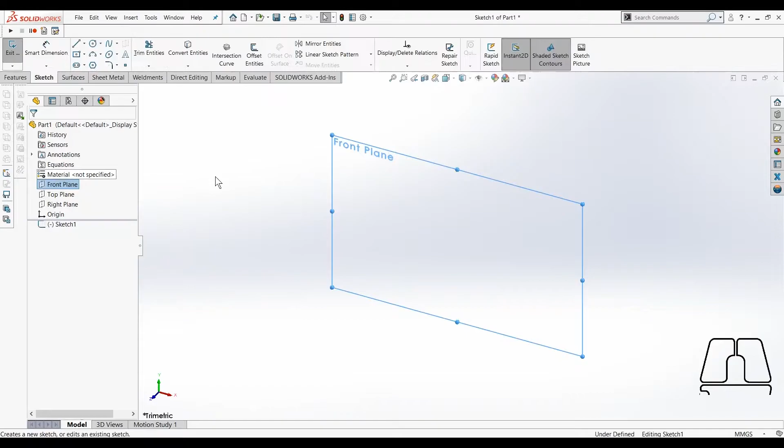So then we start a sketch on the front plane, and we will be outlining that profile view to extrude. We want to make sure that this line is vertical, as indicated by the yellow box of the vertical line, and we dimension this to be 75mm.

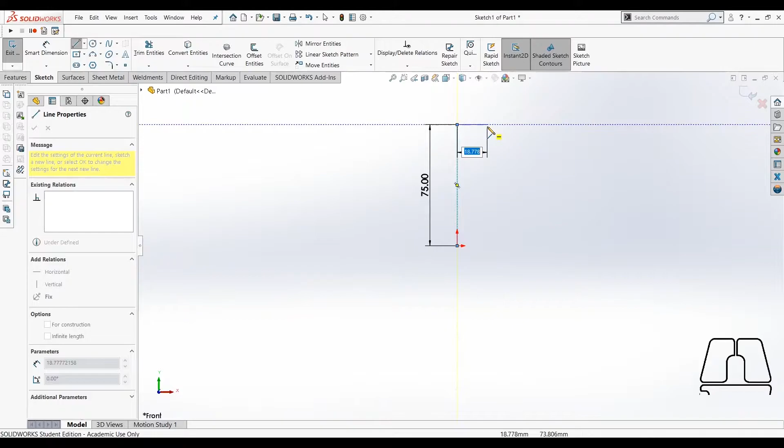And then next, we just complete the little staircase drawing. We want to make sure that we get our lines to be either perfectly vertical or horizontal. The sketch is now closed, and we can begin to dimension each of these lines.

This will be 60mm. This will be 12mm. This will also be 12mm. And this last horizontal piece will be 20mm. This distance between these two lines will be 12mm. And this edge over here will be 30mm.

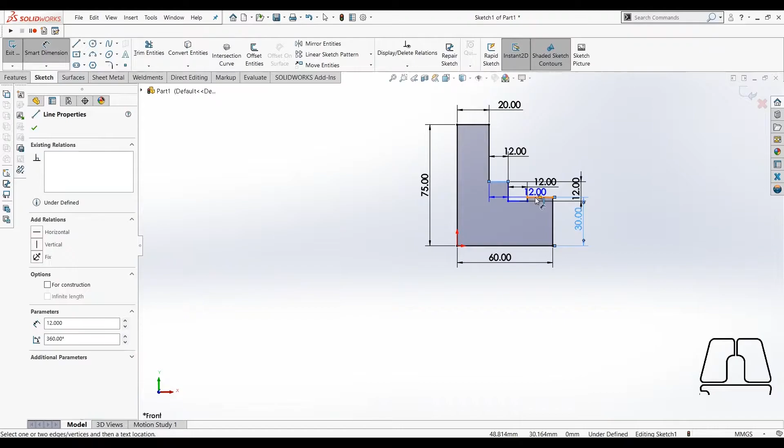And then the distance between these two lines will be 20mm. Now we can see that our sketch has been fully defined.

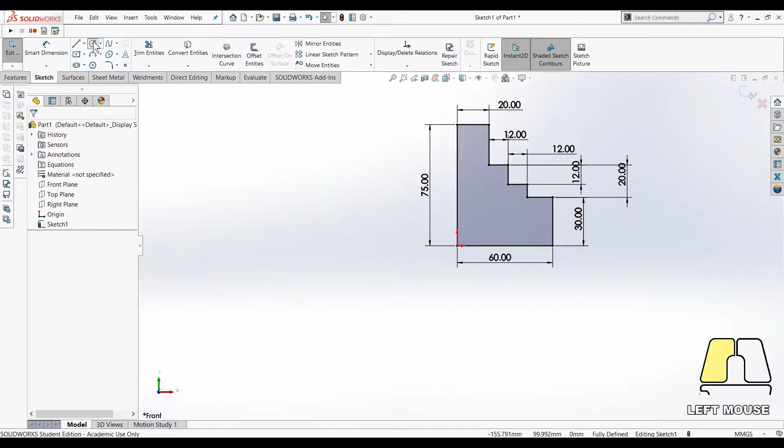Now we can add our little circular cutout. The diameter of the circle will be 12mm, and we can use smart dimensions to dimension its position. It will be 16mm from each of the edges on this right hand side.

And now our sketch is complete. We'll extrude the sketch by 28mm.

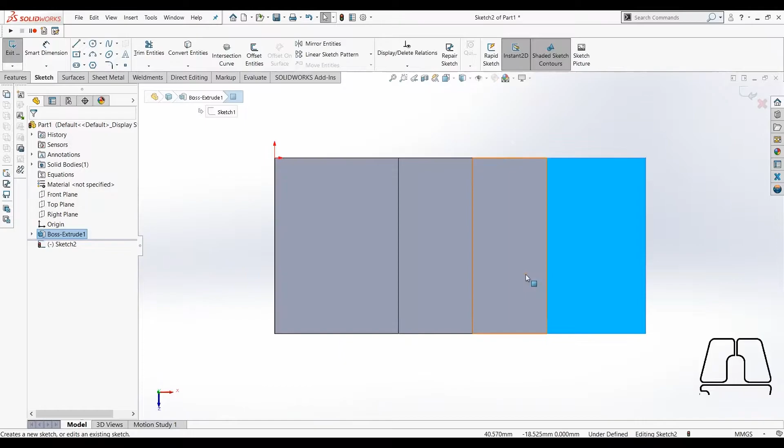And now for our second feature, we can create a sketch on this face. All we will need is a corner rectangle. We'll snap it to this corner and to this line.

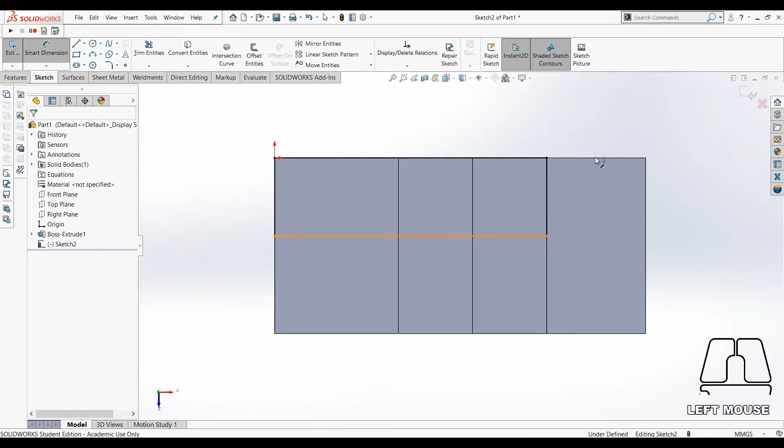And then we dimension this distance as 20mm. And this will be an extruded cut.

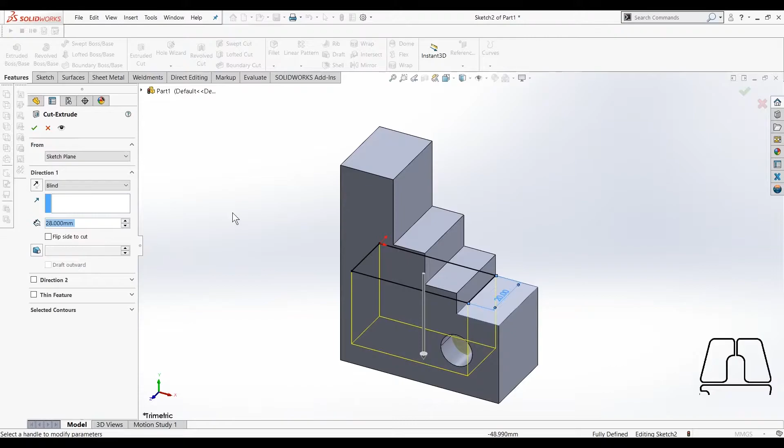First, we want to flip the direction of the cut. You select through all, and then we also flip the side to cut. So now the part's geometry is complete.

And we add a material. The material here is aluminum bronze. You can either scroll through this menu or just search it up in this handy search bar.

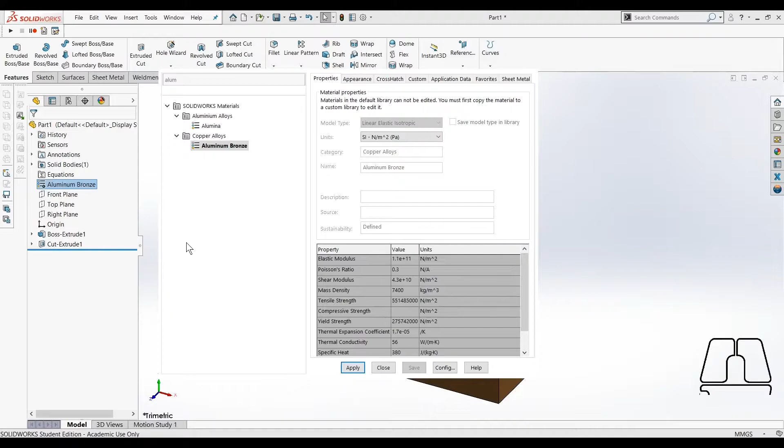After you finish a part, make sure to double check its mass properties. Well, that was our first part down. Now we'll be getting into our second part.

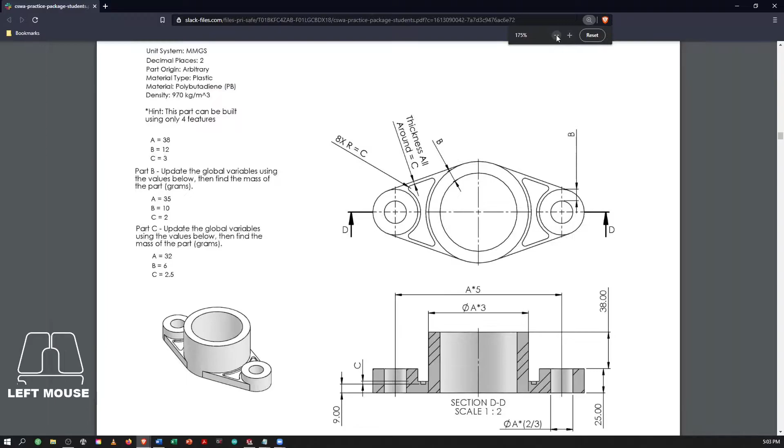This part is a tad bit more complicated. Let me zoom out a little bit. It's basically called a pipe fitting, so this might go on the end of a pipe, it might secure the pipe.

And basically you're given a couple of views here. You're given a top view, looking at it top down. You're given a side view, a kind of cross-section view, as we talked about before in our drawings video—check that out if you haven't already. And a sort of isometric view in the bottom left-hand corner.

Things to note: here it states your unit system, so millimeters, grams, and seconds. Then decimal places two—you don't really need to worry about this since all the dimensions given don't actually have decimal points. Part origin arbitrary just means that you can place your origin wherever you want it to be. Your first part can go wherever.

More specifically is PB. As Willy did, he changed the material to, I believe, some sort of copper alloy, some sort of metal alloy. In this case, it's going to be plastic.

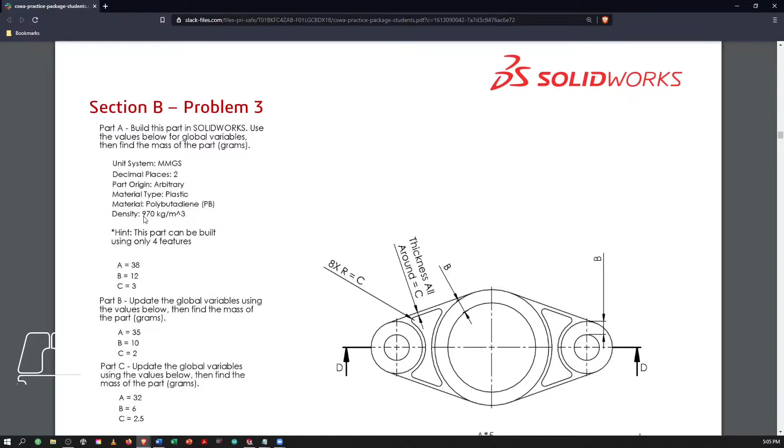And then underneath that, they give you the density, 970 kilograms per meter cubed. When you're selecting the material in SOLIDWORKS, it's good practice to just check that the density at least matches the material, so you don't select a material with a similar sounding name that actually has completely different material properties.

And then underneath you'll see some letters: A is equal to 38, B is equal to 12, C is equal to 3. These are actually global variables, and we'll be getting into how to create those in SOLIDWORKS inside of a part in a moment. You're going to need to create global variables instead of regular dimensions where you just put in a number, because in part B and part C it asks you to update the global variables using different values.

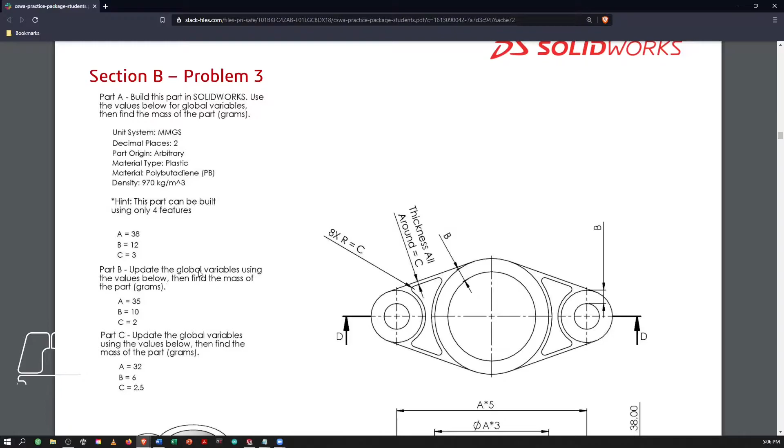If you just have dimensions, you have to go manually through and change all of your dimensions' numerical values, which is kind of a time waster in my opinion. So it's much more time efficient on the actual exam to create global variables for these numbers and then change the global variables themselves.

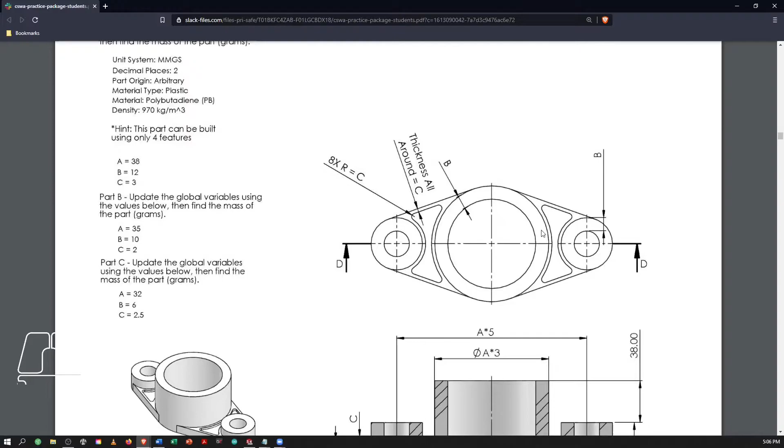Looking from a sketching mentality, what we're going to create first is this big cylinder in the middle. Then we'll create the two outside circles, and then this kind of region on both sides where it has a weird shape, and also has these little cutouts inside.

If you look at the side view, you'll see a bit more on how everything is horizontally spaced out. The centers of the two outside circles — outside circle 1, outside circle 2, same here and here — are spaced apart by A times 5, where A is the global variable, and I'll show you that you can actually put this directly into the dimension itself, and SOLIDWORKS can automatically do the math for you. You can also see that the outer diameter of the big inner cylinder is A times 3.

You also see some stuff here specific to this weird looking region. The bottom of this cutout is 9 millimeters away from the bottom, and C, the global variable, is the depth of that cutout. You also get the diameter of the little cylinder on the inside, and on the right here, the height of the big cylinder. Actually, if you add up this dimension and this dimension, you get the overall height of the cylinder.

The one last dimension we haven't covered is B — the width of the cylinder walls is B, same with the other cylinder. And sorry, there's one more: you have these rounded edges where the radius is C, and your inner weird cutout thing is spaced C from this edge, this edge, this edge, and this edge. So that's kind of an overview.

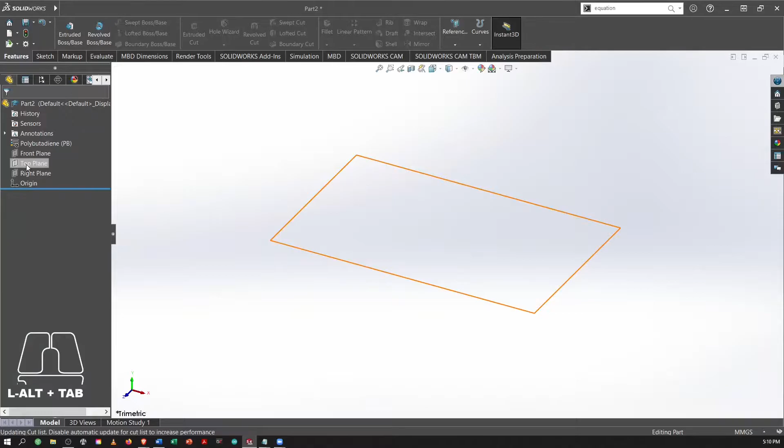As stated before, the first feature we want to create inside our part is that big inner cylinder. Looking back at the isometric view, everything kind of builds up, so it makes sense to create your sketch on the top plane. So we'll click the top plane, go up to sketch, and click sketch.

We're going to go ahead and create two circles — circle 1, and circle 2 inside circle 1. Looking back at our drawing, we can see that the thickness of the wall is B, so we can put that in first.

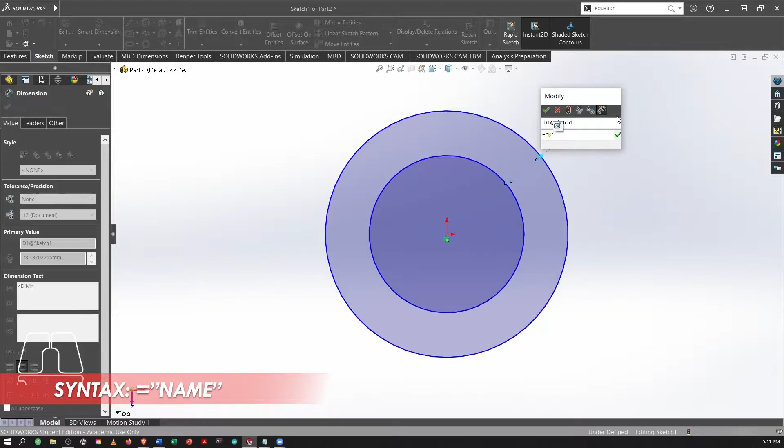If you put a dimension between these two, it pops up wanting you to enter a numerical value, or so it seems. But as mentioned before, we want to use a global variable instead — in this case B. To enter a global variable into a dimension window like this, or many other windows in SOLIDWORKS, you press equals, then double quotes, the name of your variable — in this case B — then end with another double quotes. You'll see a little globe appear with a plus in the upper right hand corner. When you press enter, in this case I haven't yet created the actual global variable named B.

So it says create a global variable named B, so yes, we want to create it. In this case, B updates to the value that I had before, which is this random really long number. We'll actually go ahead and change that right now. So we're just going to go ahead and click OK, exit, and okay, so B in this case is shown to be this random number.

We instead want B to be 12, A to be 38, and C to be 3. So we'll create B is 12, A is 38, and C is 3. 38, 12, 3. Yep, it works. And then we click OK.

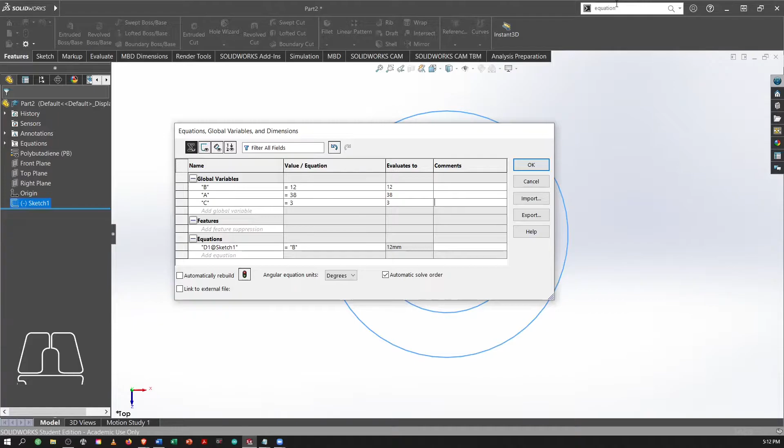So in order to access this equations window, you just go into the upper right hand corner, search bar, click enter in equation, and then it should be the first result, and it'll pop up with this window. Then click OK, and you can see it instantly changed the width between the two circles to reflect the new updated value of B.

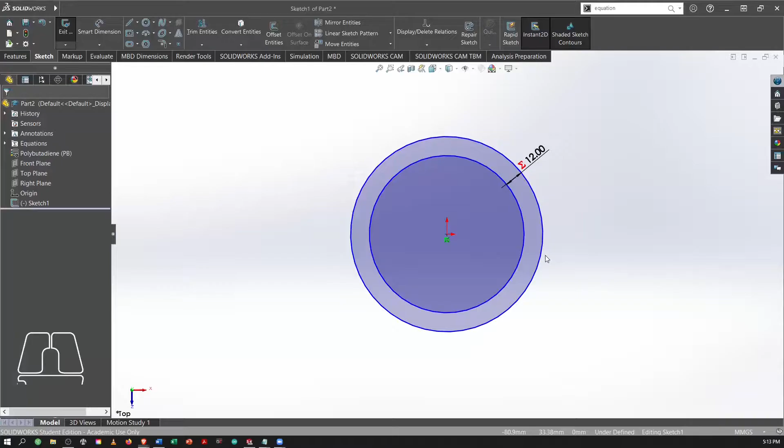So now we can go back into the sketch and finish defining it. The next crucial dimension that we need is the outside diameter of the outside circle, which is A times 3, so we're going to go ahead and just do that. A times 3, A times 3. There we are, and now you can see in the bottom right hand corner that says fully defined.

So yeah, that's good. Then we need to create an extruded boss/base. As I mentioned before, the height of this big cylinder in the middle can actually be found using 38 plus 25. In SOLIDWORKS, you can enter this directly into the dimension, so you can say 38 plus 25, press enter, and it automatically evaluates it for you.

So just pretty standard, you just have a cylinder in the middle, and now we're just going to be creating the 2 circles on the side. We're going to go with another sketch on the top plane, zoom out a little so you can see more, and we're creating these circles on the left and the right. So yeah, we'll just go ahead and create that.

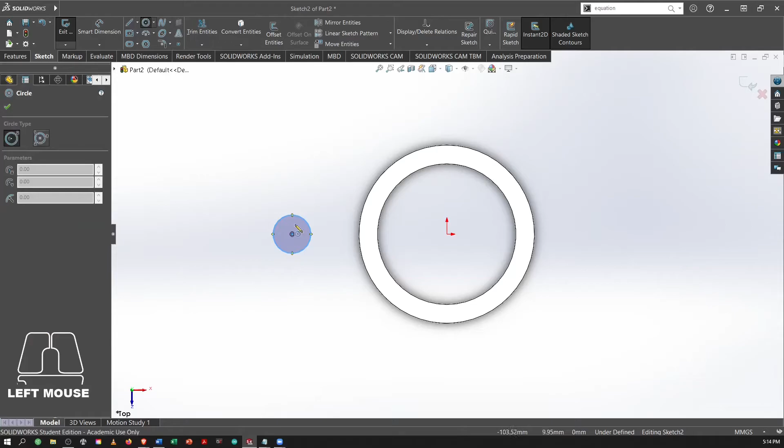So we have this forming the left cylinder. I'm just going to create everything only on the left hand side, and I'll mirror everything to the right later just to save me some time. So we can see from this dimension in the bottom right hand corner, it says the diameter is A times 2/3. This is the inner diameter, so we'll just go ahead and put that.

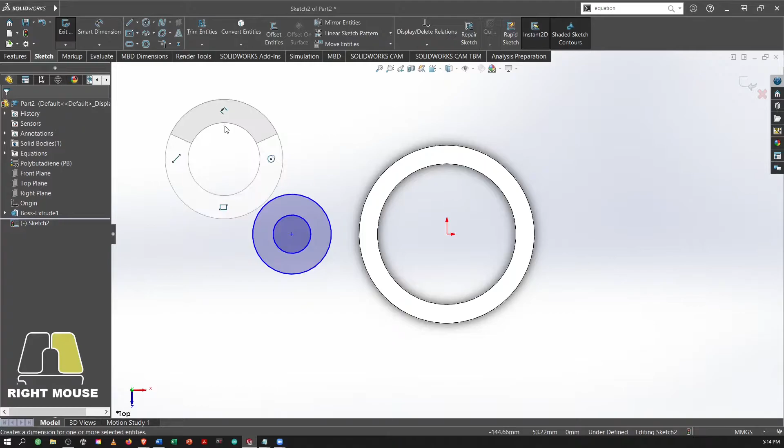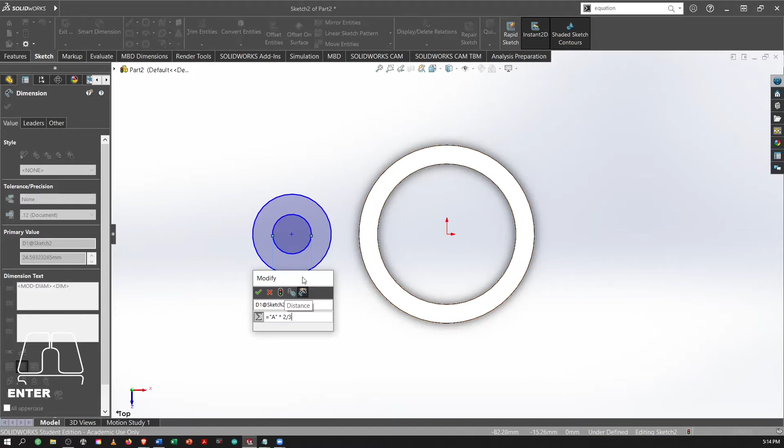So we're going to select our inner diameter, and again, equals, then quotation marks, your name of the global variable, end it with quotation marks, and then multiply, in this case, by 2 divided by 3, or 2/3. Press enter, it automatically evaluates, and press the check mark.

Then you know that all widths of the cylinder are B in this case. So then you select the outside circle, inner circle, then you enter in B. Oops, I forgot that. Okay.

Okay, that's all fine and well, but what is the distance to the center, or to this kind of the central line of this part? So first, what I'm actually going to do is mirror this left set of circles to the right, and then create the dimension in between them. In order to mirror, as usual, you just create a center line, or any line for that matter, and then select mirror entities. We want to mirror these two entities and mirror them about this.

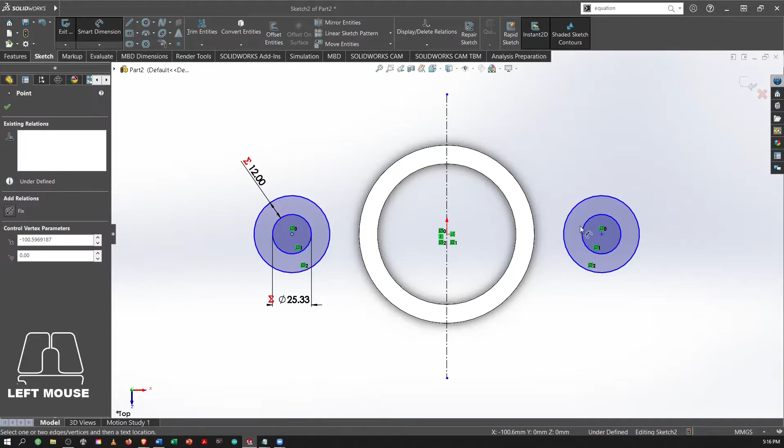Okay, that's good. Now we're going to be spacing them out in the horizontal sense. So the center of this set of circles is A times 5 away from the center of this set of circles. So we're just going to go ahead and dimension that in. This point, that point, and set it to A times 5.

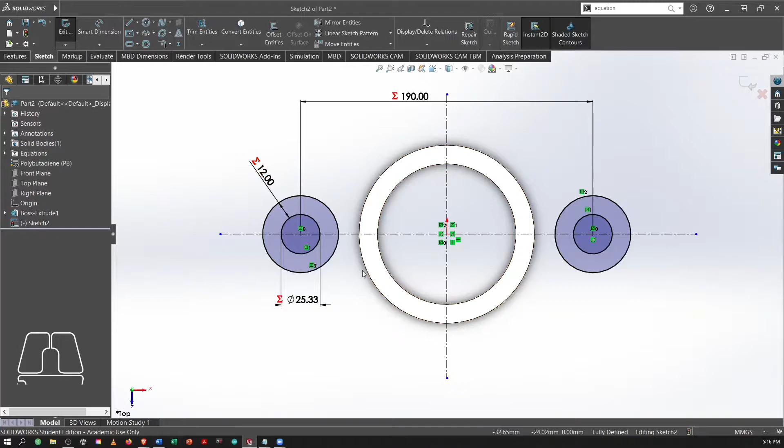Okay, nice. So it still says underdefined. Oh, okay, looks like I just needed to create a center line through it, and then SOLIDWORKS kind of just corrected its own mistake. So yeah, now we have these two circles on the left and right hand sides, and now we can just extrude them upwards.

And of course, we don't want 63 millimeters, we want 25. So this is the height of these two cylinders, 25. We're going to go ahead and put that in, 25. Press enter, press OK, and it's starting to look like the part is specified in the drawing.

Next, we need the weird shapes on the left and right that connect these two cylinders with the big cylinder in the middle. To create these, we're going to use a pretty simple sketch - just 4 lines, each tangent to these circles.

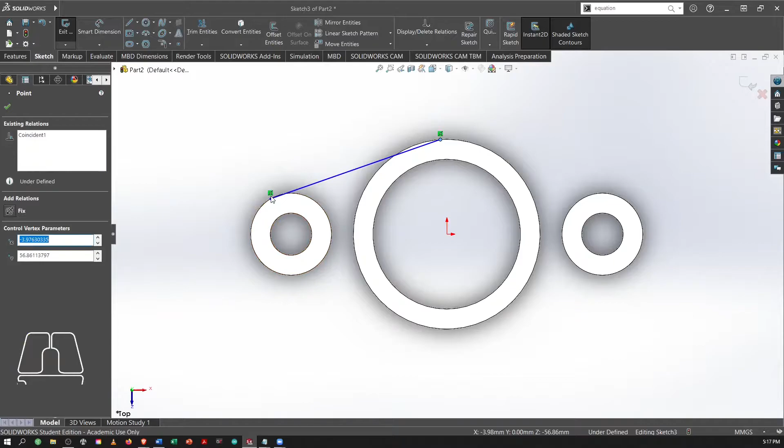Right now you can just move it around the circle, but we want it to be tangent. So you select the line, select the circle, and click tangent. Press OK. I'm going to do the same to this one.

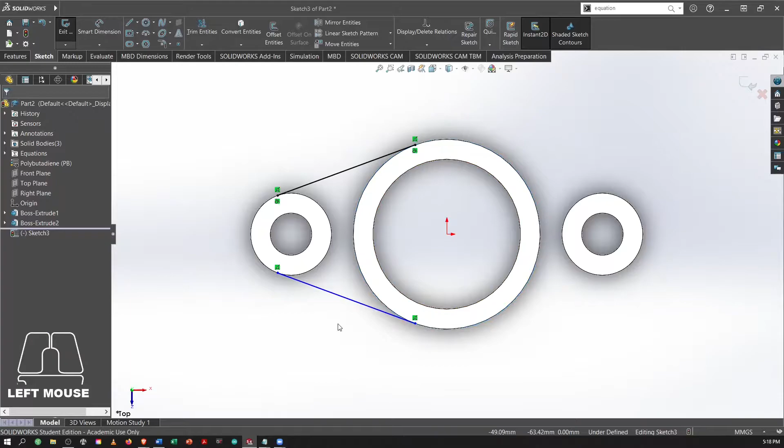So this is one line, and again I'm going to use symmetry. I'm just going to create a line, make it tangent, and make this one tangent too. Okay, they're both fully defined.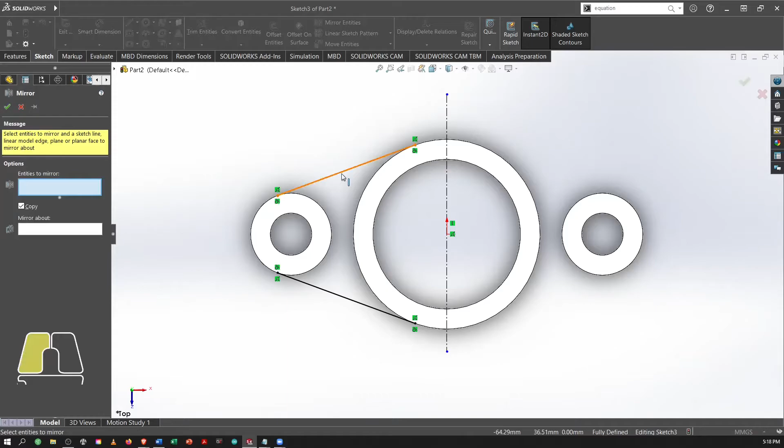Now we're going to mirror both of them to the other side. Mirror entities, select those 2 lines, select the center line, and it automatically goes to the other side. But now you can see it's not a closed sketch - it's still open. So we need to convert a couple of entities. These 3, we click convert entities, which automatically projects them onto the current sketch plane.

Then we're going to trim away everything that we don't need - that, that, that, that, this, and that. Okay, so now we have a fully defined sketch. It's what we want it to be.

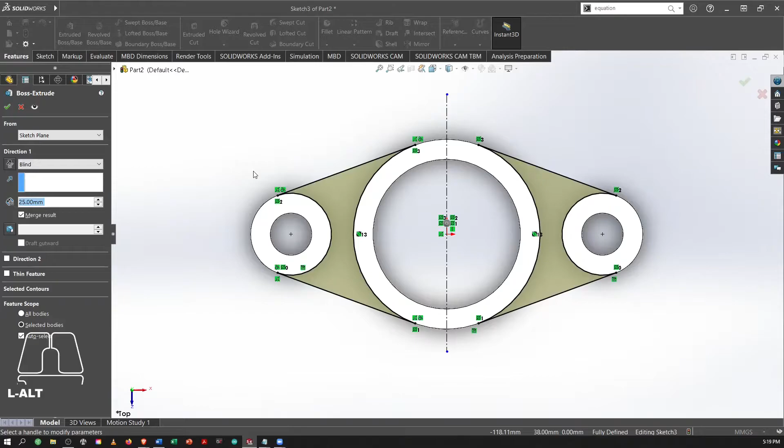We're going to go over to Features, Extruded Boss Base. What height are we going to use? If we refer back to the drawing, the height is simply 9 plus C. Even though this isn't the standard dimensions window, you can actually insert a global variable into it - so you want C plus 9. Press enter and it automatically evaluates.

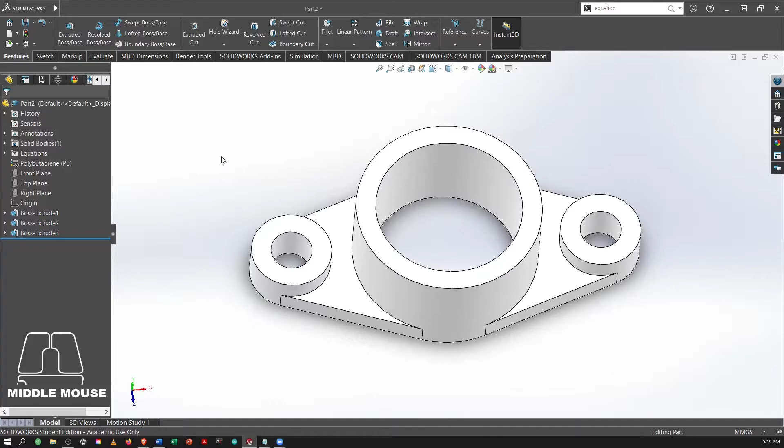So now if you look from the side perspective, all we're missing is just these little cutouts in the middle. To create these cutouts, I'm going to create another sketch on top of these little connecting portions that we just made.

We're going to use the offset entities tool. We're going to select this edge, this edge, this edge, and this edge. This is not actually the full outer circumference of the circle - it's only the part that's been intersected by the lines I've already selected. So we select that and click Offset Entities. Actually, this is, to my knowledge, the only box where you cannot enter in a global variable.

So in this case, we're just going to enter in 3, and click the check mark. Oops - you actually have to reverse it, and it comes out right. Now we have a true dimension here, so we can go ahead and input the value of C, which evaluates to 3.

Next, what we're missing is these little sketch fillets on the sides. You can see they have a radius - there's 8 of them, and the radius is C. One here, one here, one here, one here, one here, one here, one here, one here. So we're just going to create those right now.

Click the sketch fillet icon and just select 2 adjacent lines or arcs. Then we're going to change it to 3. I find that if you input C directly, it doesn't really create a global variable reference, so I'm just going to enter in 3. We want to create another one here, and another one here, and another one here.

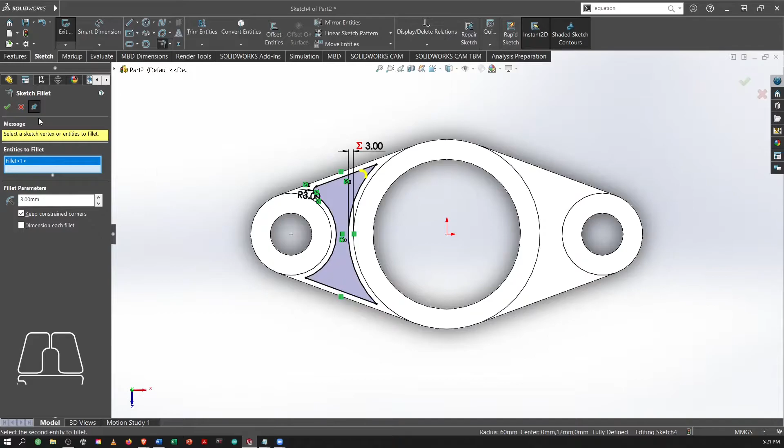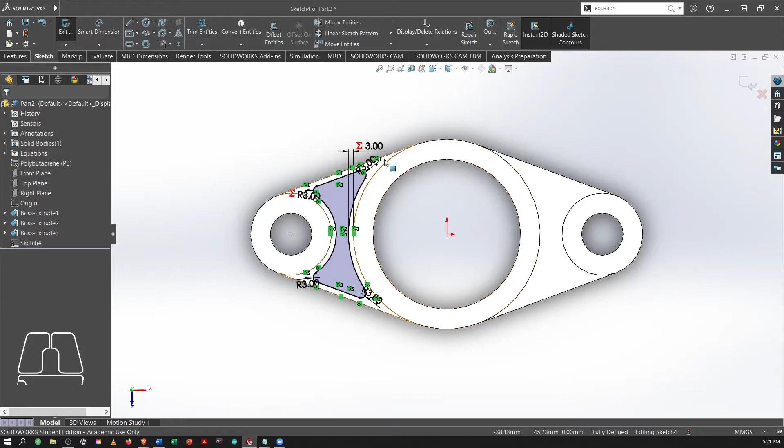Okay, now we can use the power of relations. First we're just going to make one of them equal to the value of the global variable C, and we're going to use relations to make everything equal to each other. So first we're going to delete these dimensions. Okay, maybe we can't delete those dimensions.

So we just go ahead and type in equals C, and just copy that. I didn't mention this before, but you know if a dimension has an equation attached to it if it has this little sigma sign in front of it, in red.

So now we have everything on one side, now we just need to mirror it to the other side. We'll go ahead and create a center line and mirror everything to the other side.

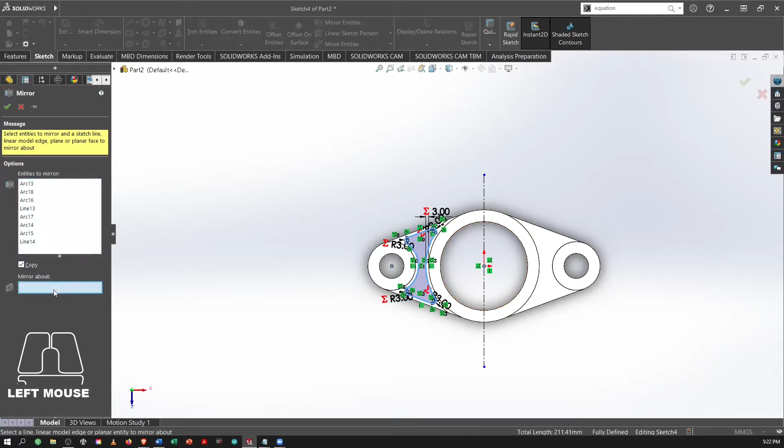Press the check mark, and this is a cut, so we're going to use extruded cut. How deep is the cut? Well, it says right here that the cut is C deep. So we're just going to enter equals C. Press the check mark, and there it is, that's our completed part.

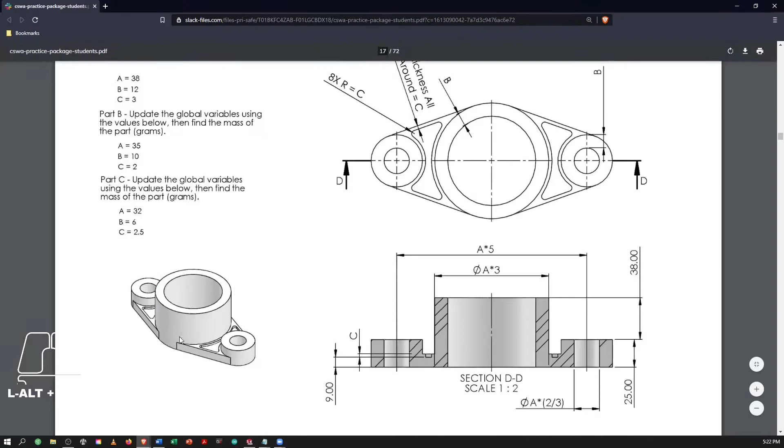As you can see, the isometric view looks exactly the same. We've used all the dimensions specified in the drawing. Some of them we had to combine, such as the 38 and the 25. But for the most part, quite simple and according to the drawing.

You can go to Evaluate, then Mass Properties, and it will output the mass of your part. You can see that the mass is 346.49 grams. This is calculated according to the density and the volume of your part. The density is given in the material properties, as I specified at the very beginning, and it just calculates the volume of your part, then comes out with the mass in grams.

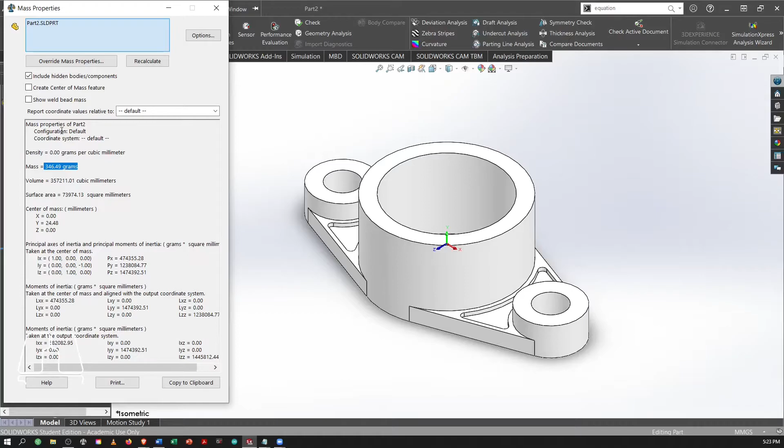So this is actually just part A. But part B has you updating these global variables to different values and then finding the new mass. In this case, it wants you to change A to 35, B to 10, and C to 2. So we'll see how that evaluates.

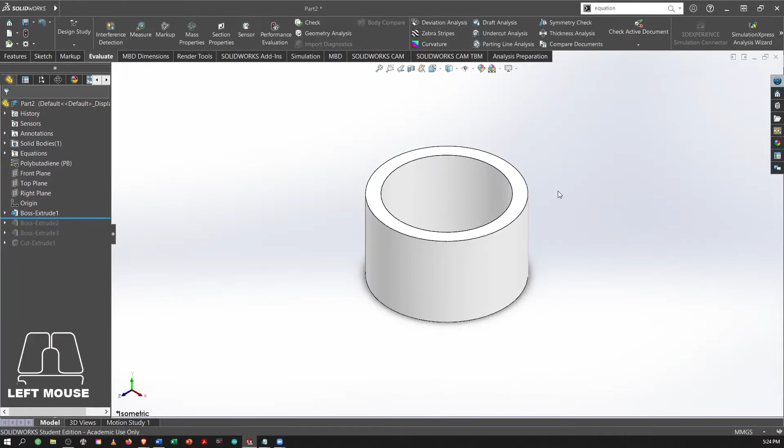You just press OK, and it will automatically rebuild it. Feature sketch 1 has a warning. Let's see... you changed A to 10 and B to 35, not the other way around. Oh, good catch, very good catch. Sorry, wait, A to 35. Okay, 35, I should have probably made it in alphabetical order. Okay, 35, and then we click OK. And then I need to move the rollback bar back down.

Awesome, so this is what the updated geometry looks like, and that's for part B. Then you would find the mass in part B.

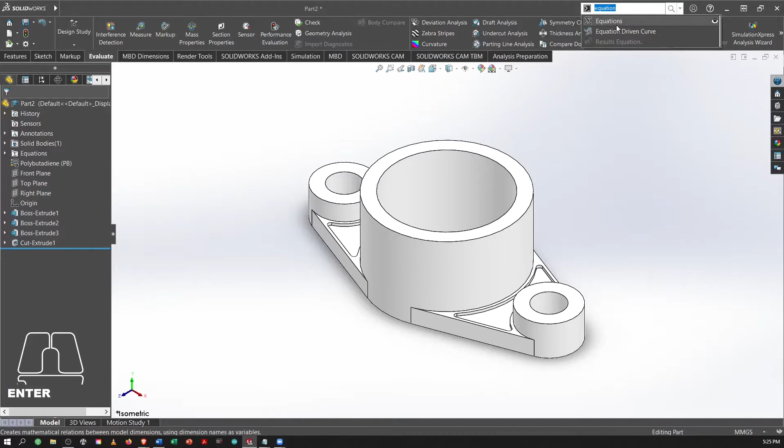Lastly, in part C, it wants you to change A to 32, B to 6, and C to 2.5, so we'll go ahead and do that right now. A to 32, B to 6, and C to 2.5. Click OK, then the part automatically rebuilds itself. And yeah, this is part C.

Alright, this is our last part for the video. As you can see, this part wants us to make a gear. The first thing we're going to do is make a circle, and you can see I've already done that in SolidWorks. This circle corresponds to this one right here. This circle has a radius of 8, and this is kind of important.

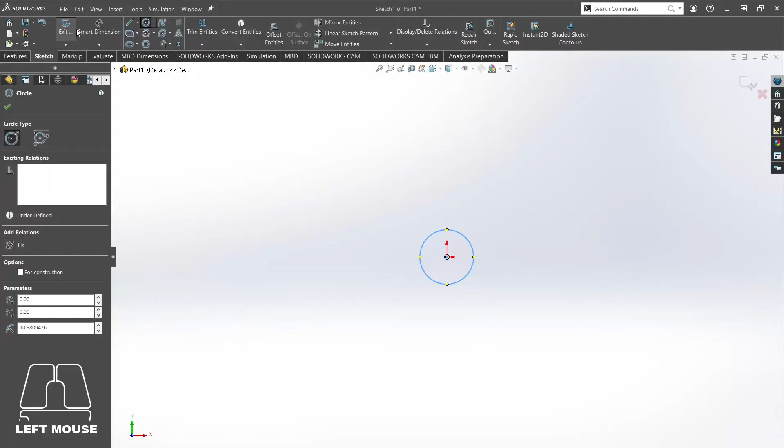This is one of those times when they're trying to trick you. They're not giving you the diameter, they're giving you the radius. So when we go into Smart Dimension and make our dimension, we've got to take the 8 into account. We're going to make this a diameter of 16, because that's twice 8. Okay, and then we're going to go back out.

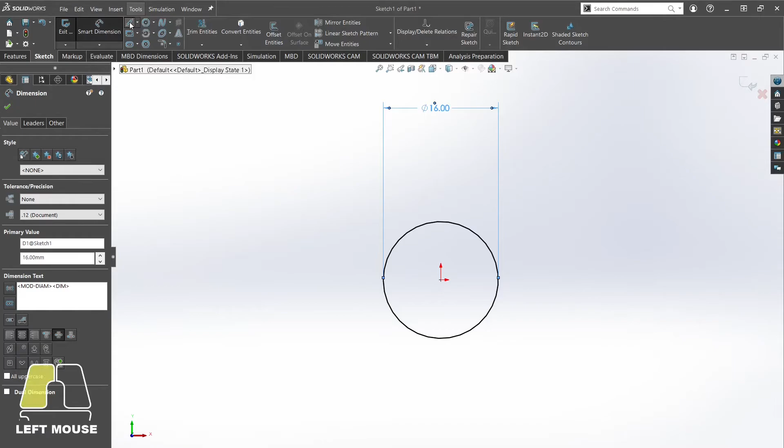Now we're going to make this little key, which just helps the gear turn if it was in real life. We know that the top of the key is 10 millimeters away from the center of the gear. So we're going to go back into SolidWorks, make a line, and say that it is 10 millimeters away.

Now we can go back to our drawing. We can see that the width of that line is 3 millimeters, so let's do that as well. Now you can see it's off center, and I can move it around.

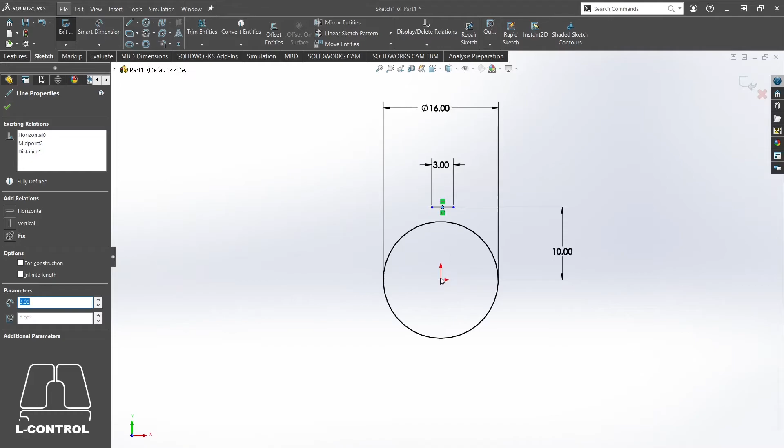So what we want to do is take that midpoint—you just click on the line, slowly move your mouse over it. You can click the midpoint, then click the middle of the circle. We'll get our Relations tab over here and say this is vertical. Now we have this exactly over the middle of the circle, and we can take some lines down to the circle, down to the circle, and cut away this. There you go, we have our circle and a little key on top.

Next, we're going to make this bigger circle, and that one does give us a diameter, so we're going to use a diameter of 28. We can go into here and make this a diameter of 28. There you have it, that's our little middle part of the gear. That's about all we can get off of this part of the drawing.

So we've made this circle. We can do maybe this outer circle, right? How do we figure out how big this outer circle is? Well, it doesn't give us a diameter somewhere. We don't have a dimension that goes like here.

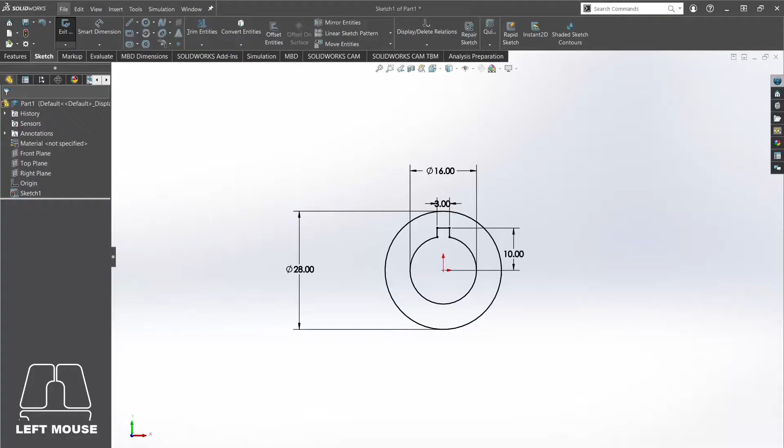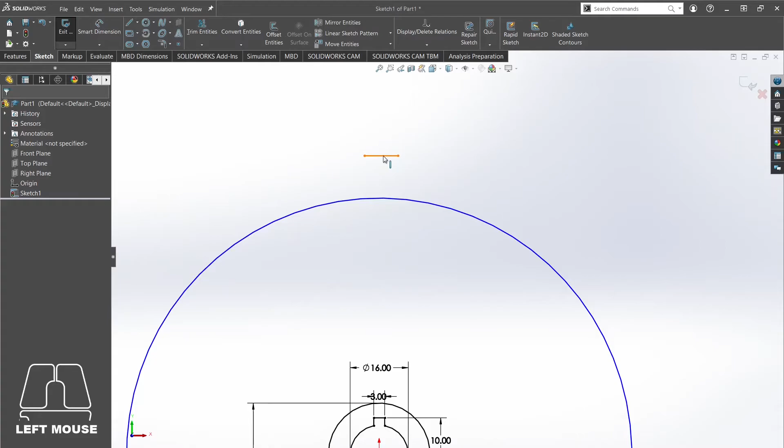Okay, so we're going to do kind of the same thing we did for this key down here. We're going to make a line, and we're going to say that the middle of this line is vertical to the center of the circle.

We're going to give this some gear tooth looking diagonal lines, and if we look over here, we can see that the width of this is going to be 4, and this angle here is going to be 40. So let's do that real quick. We can say this is going to be 4, and we could say that the angle between these two guys is going to be 40. That looks a little weird, I know, but that's just because there's not enough relations.

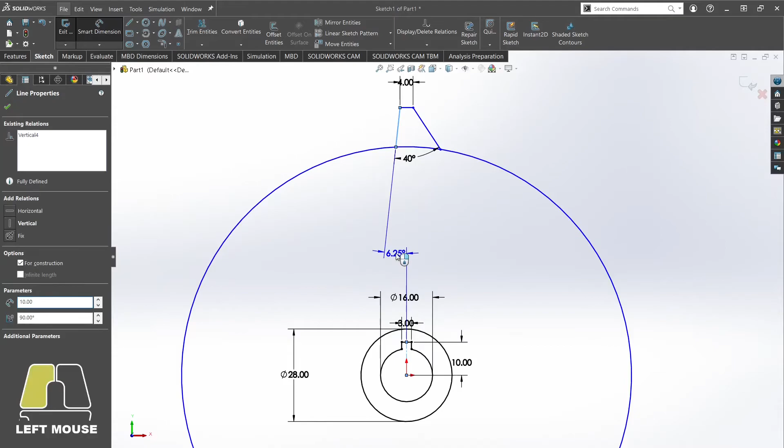Next, we're going to make a construction line, and this will make our gear tooth look a little bit more like a gear tooth and not like a weird saw blade maybe. We're just going to make a line there. You don't have to define it because it knows that this length is already 10. And we're going to say that the angle between this and this is going to be half of 40. That's 20. There you go.

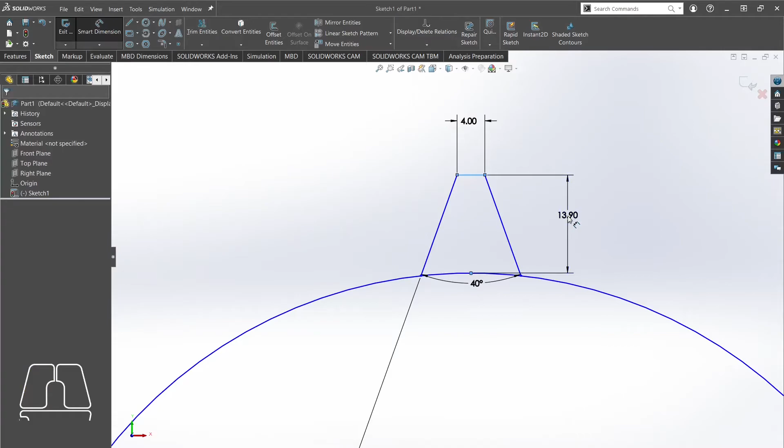And now we can make a point up here at the top of the circle. Going back to our drawing, we can see that this dimension from the top of our gear tooth to the circle is 6. So we can say from here to here is going to be 6. Okay, and now we have that.

Okay, we're going to do a circular sketch pattern. We're going to come down under the linear sketch pattern tool, and we're going to select circular sketch pattern. We're going to select entities to pattern, the gear teeth lines that we made, and this is important, the circle. This will make it so that the gear teeth are connected to the circle, so that when we make our dimension later from the top to the bottom, it's going to keep it on the circle and not go crazy.

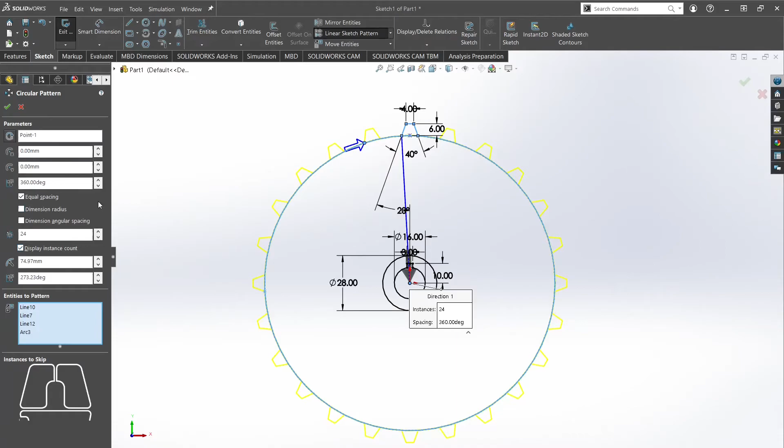You can see here I have this blue line going from the middle to here. That's because I have this dimension radius option checked. You don't want that, that's not helpful for us. So we're going to uncheck the dimension radius. We're going to up the count to 24 because there are 24 gear teeth based on the number of teeth, right? B is the number of teeth, and we have B up here is 24. So come in here, up that to 24. It knows, since I selected the circle, that it wants to rotate around this point. We're going to say click, and we have a bunch of gear teeth.

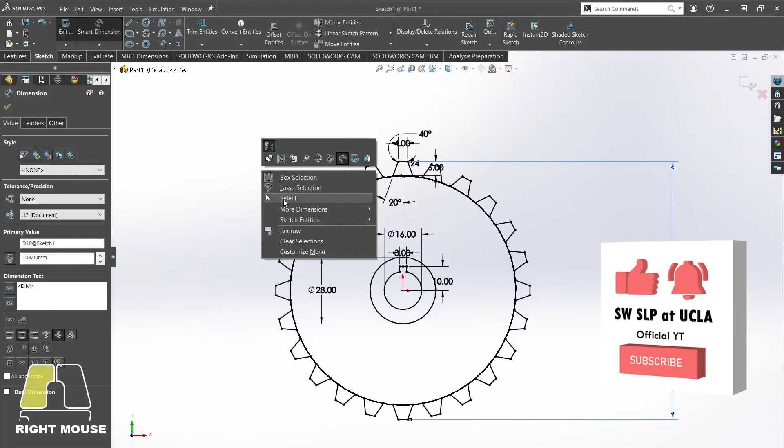That's good, so now we can come to the smart dimension, use that, we can say this is 108, and boom, we have the right size. And the way I knew it was 108 is because A is equal to 108 over here.

Now that we have that, we can start naming some variables, and these are going to be important later too, because we have a couple different parts of this, right? We have part A, which is all this, part B, which is all this, and part C here.

So to help us make sure that we can easily edit that stuff, I'm gonna first select this, and say this is equal to A. You can see this little global pop-up, and it's going to say create global variable, and I'm going to say yes. Now I have a global variable called A, and you can see this equations folder pops up, which wasn't here before. If we open this up, we can see A is equal to 108. This is going to be helpful later, and it makes it really easy to change what A is.

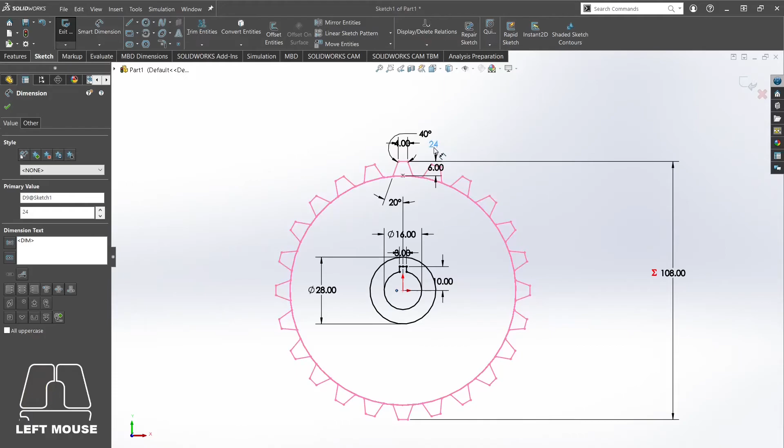The other part you can see is this 24 here, that's the number of teeth there are. If you remember, B is equal to 24. So instead of having this be 24, I'm going to change it to saying B, and it's going to say you're overriding value text, and it doesn't really matter. But now I have B here, and I can change it however I want.

Now we're going to keep working on our drawing, and we have a little bit more to do before we can start extruding stuff. So we're going to get to our last variable, C, and erase some of this stuff so it's easier to see. Okay, so we have a couple things.

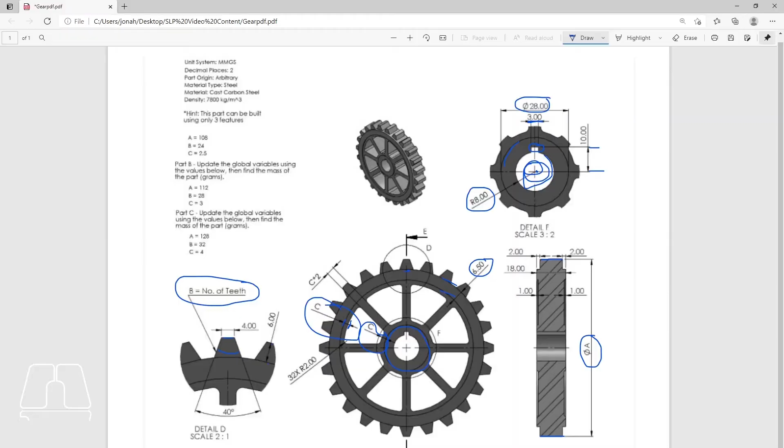First off, we know that from the outside diameter circle to the inside diameter circle, we have a dimension of 6.5. So we're going to make another circle, 6.5 millimeters away from the outside. We have that circle. And then going back, we have two dimensions here, C and C, and that's the dimension from this inner circle to this inner circle.

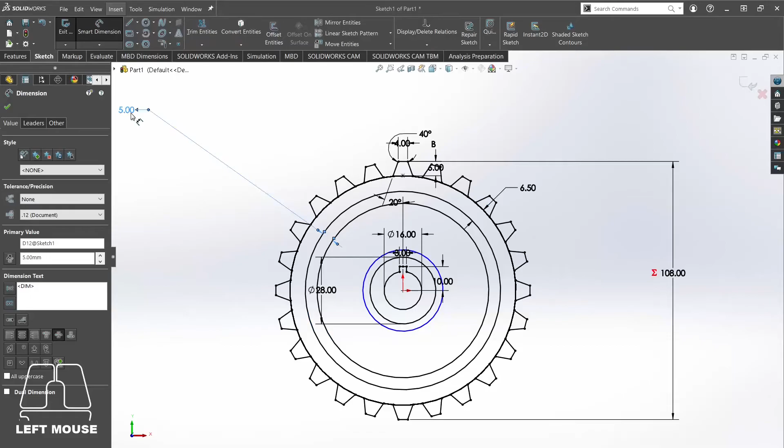So we're going to get two more circles, one here and one here, and that's going to be equal to C. We're going to come into here and give that a value of, let's say 5 for now. But let's come back - we say that C is 2.5. So let's actually make that 2.5. Double click on that, say this is 2.5. And then we're going to double click on it again. This is equal to, you have to do the quotation marks, C. We're going to say create new variable. And now we have that C, from the equation, C is equal to 2.5.

Instead of making this also 2.5 here, we can do dimension here, say this is equal to C. We're going to get this drop down menu, and it's going to say C is 2.5. We're going to say yes, this is also C. There you have it - we have both of these equal to 2.5.

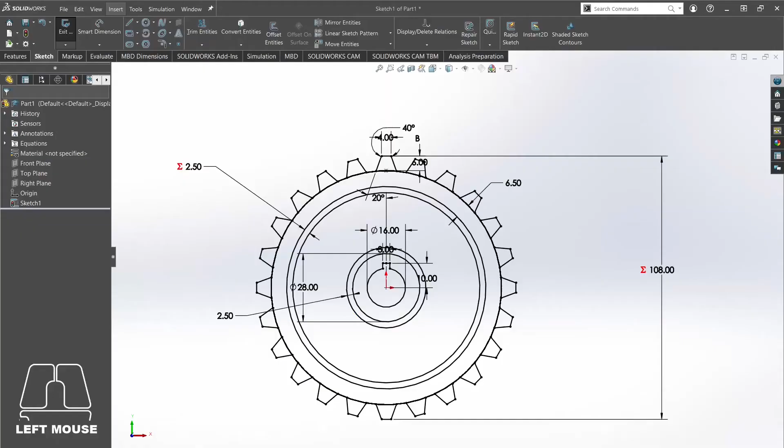Now all that's left is to do these spokes, and this should be pretty simple. It's very similar to the way we did the gear teeth and the rotations. So what we're going to do is just come up here - it's a little messy. We're going to make a line going from the top to there, and from here to there. You don't need to make it perpendicular or anything, we're going to fix that right now. So these have to be parallel. And then we're going to say these are also always going to be equal length. So now if I move one, they both move.

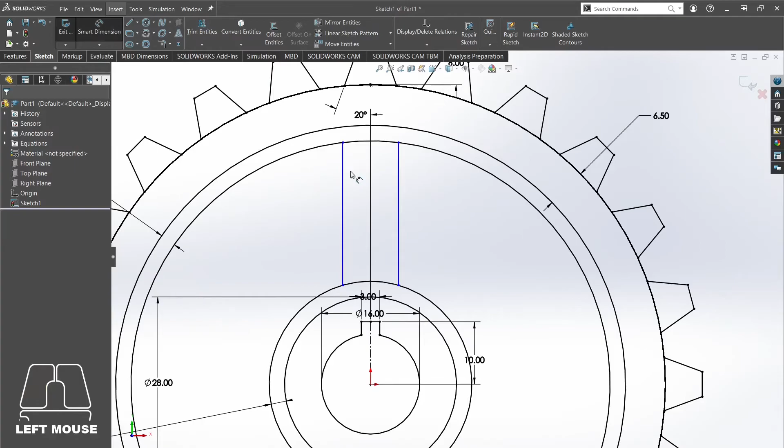And then I can say that the dimension between these two - now what's the dimension going to be? We can look here, where is it? Oh, it's right here - wait, it's C times 2. So what we're going to do, we're coming here, we're going to say this is C, we're going to say yes, this. And I get a space, multiplication symbol, 2. And that should give us 5. Is that correct? 2.5 times 2 is 5.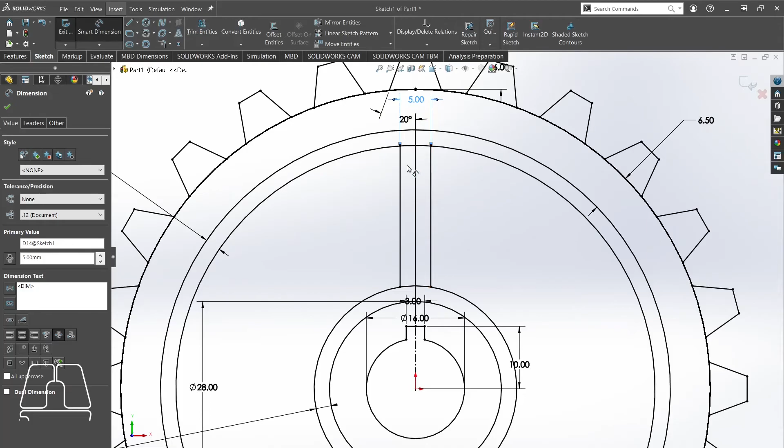Very good, okay, now we have the spoke of our gear. Fantastic. So let's come back into the circular sketch pattern again, and we're going to select our spoke lines, inside and the outside. And it knows that, and we're going to say this is 8 - and this is 8 because we have 1, 2, 3, 4, 5, 6, 7, 8 spokes. Say yep, and there you have a fully defined gear. So we're going to say exit the sketch, and then we can do an extruded boss base. This is where we start making that part.

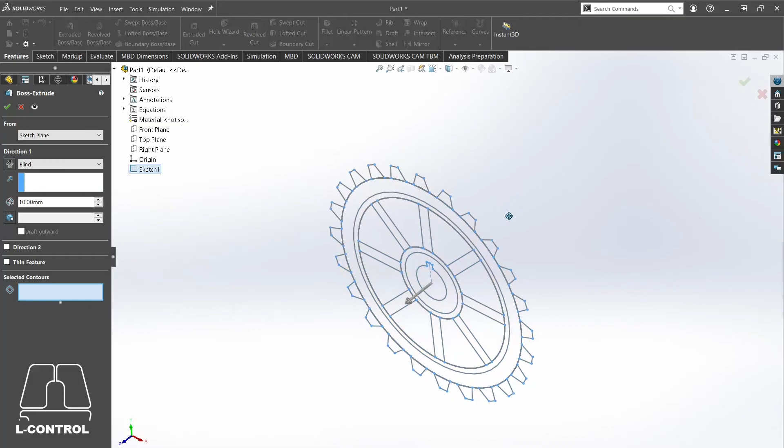So we're going to choose sketch 1. The best way to do this part, I've found, is to use it as a midplane, because we have symmetry across this axis in the middle, right? We have 1 millimeter off here, and 1 millimeter here, 2 millimeters, etc.

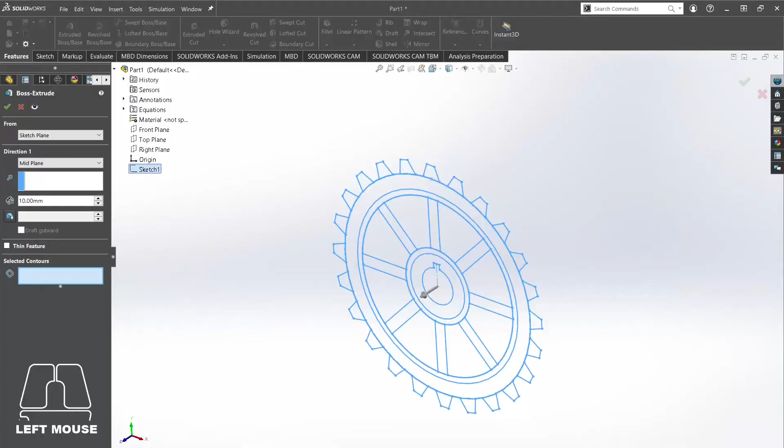So we're gonna start off doing the largest dimension. That's gonna be this guy right here. You can see it goes on both sides. It's symmetrical across this plane in the middle.

And then the other part that is 18, you can see from here, 18 is this dimension. This is a little less, this is a little less, these are definitely less. But this guy in here, the middle circle, that's going to be more, right? So we'll also select this, and change this dimension to 18, and that's going to be the total length. It's not going to be 1/2, it's going to be the total.

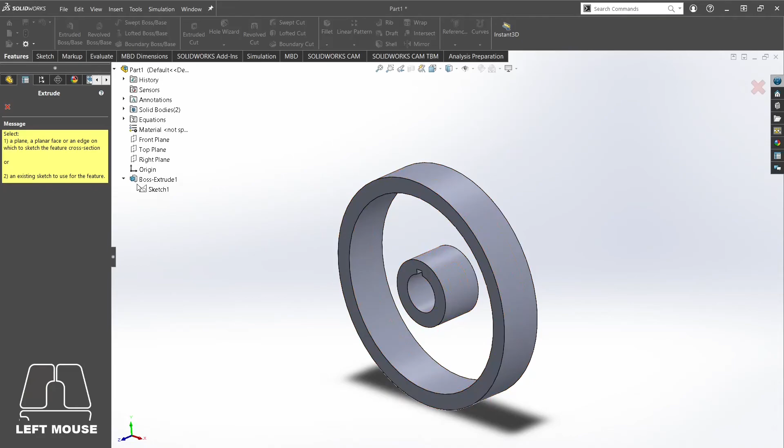We'll say yes. And now we have 2 little circly thingies. So we're going to do another extruded boss base. We're going to drop down this menu here. This is the way we get back to our sketch, so we can select it again.

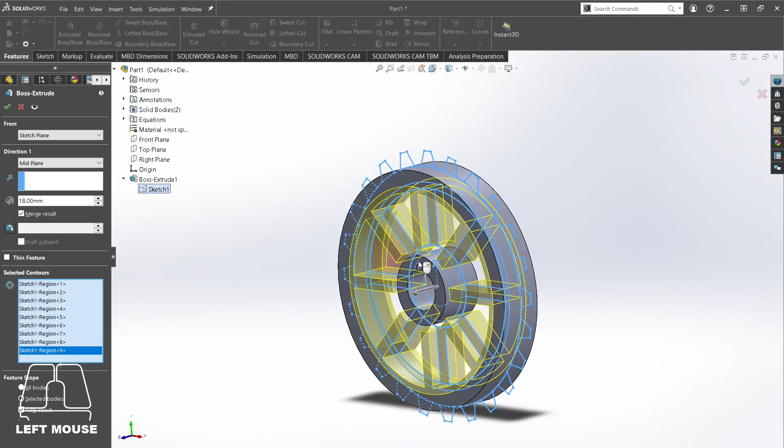And I'm going to do the insides now, because I don't like having multiple parts. Of course, we're going to do midplane for all this. Let's take 2 seconds, select all of them. And so now we know that it's 1 millimeter off both sides. So what it has to be is 18 minus 1 minus 1, so 18 minus 2, so it's 16.

And if that happens, you can just go into here and click Edit Feature and select another region here. And now we have spokes all connected to the middle part. We have 1 solid body instead of 2.

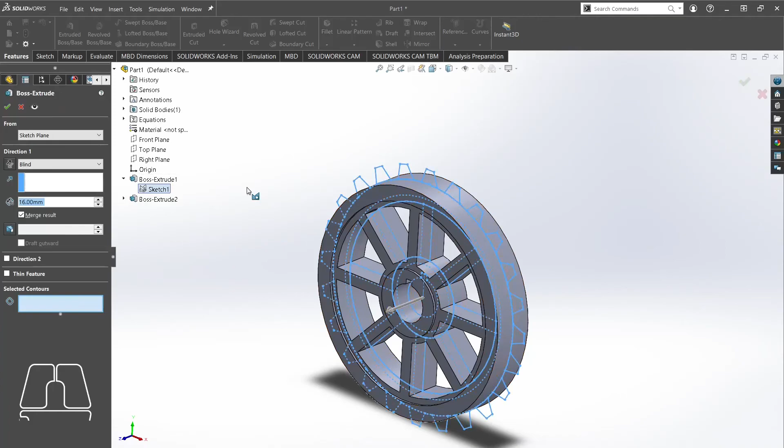So now we're going to do the extruded one more time. Select the sketch. I'm going to select all of these guys. It's going to be a little time consuming. Okay, you can say this is a midplane again.

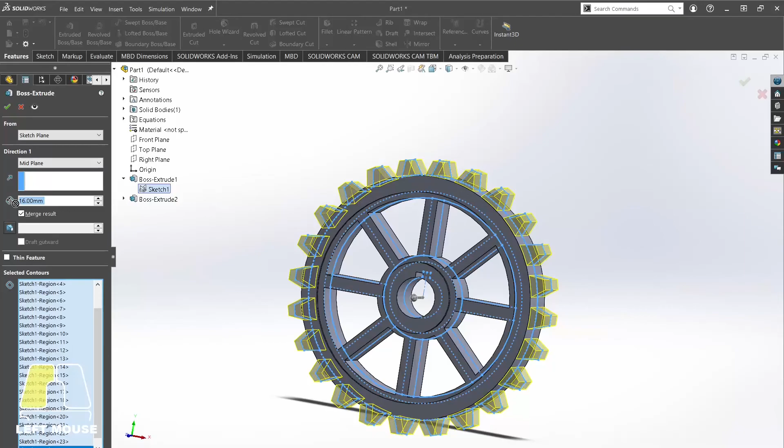And these guys are 18 minus 2 minus 2, so 18 minus 4. It's going to be 14. That looks about right, doesn't it? And boom, you have a gear.

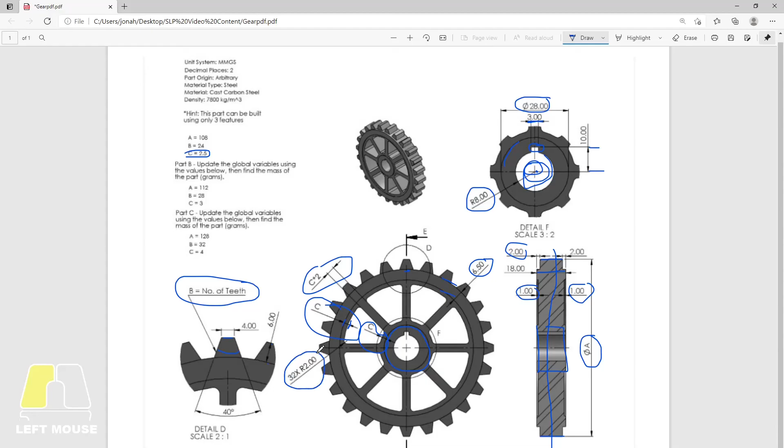But wait, there's a tricky thing, and this will get you - it got me the first time I was looking at this one. You can see we've got this last little dimension that we haven't used, and that's the radius of this fillet. It's easy to miss this little fillet, and there's 32 of them, so it's going to take a little while to click all of it. But there's no other way to do it. You can't fillet it in the sketch because it doesn't like straight lines coming to a point with a circle.

So you have to select this edge here for every single one. So there, there, there, there. You have to do it for all of these holes. So let's do just that. We're going to come over here to our fillet. We know that this fillet is going to be of a radius 2. And now we're just going to start filleting stuff.

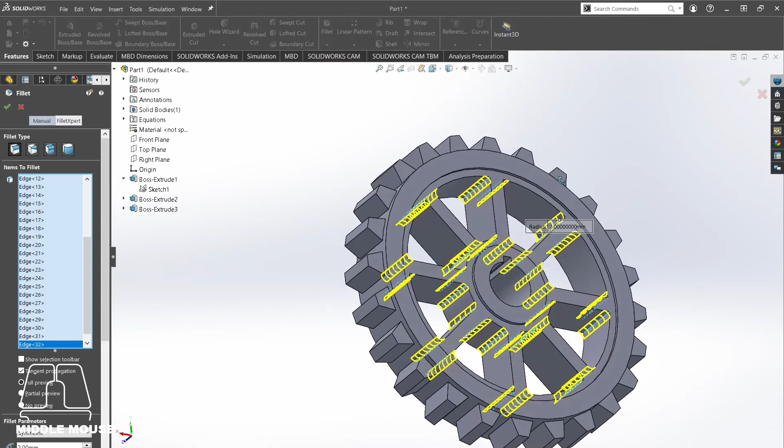Okay, now you can see I have all of my edges selected to be filleted. There are 32 of them. Edge 32. Say yes. And boom, you have completed gear.

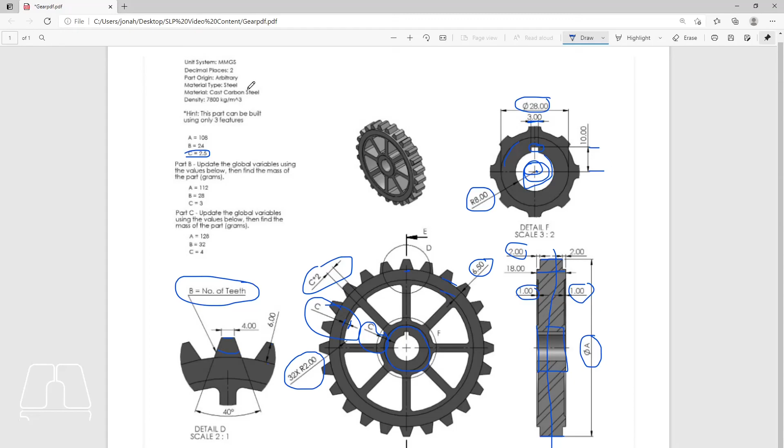And the final step in this process for the test, you're going to have to get the material. So we can see that the material is cast carbon steel. We're going to take note that the density is 7,800 kilograms per meter cubed.

So let's go here. We're going to say material, edit material, and bring this into here. And then we're going to say cast carbon steel - cast carbon steel, there it is. We can see that the mass density is 7,800 kilograms per meter cubed. That's right, so we're going to apply that.

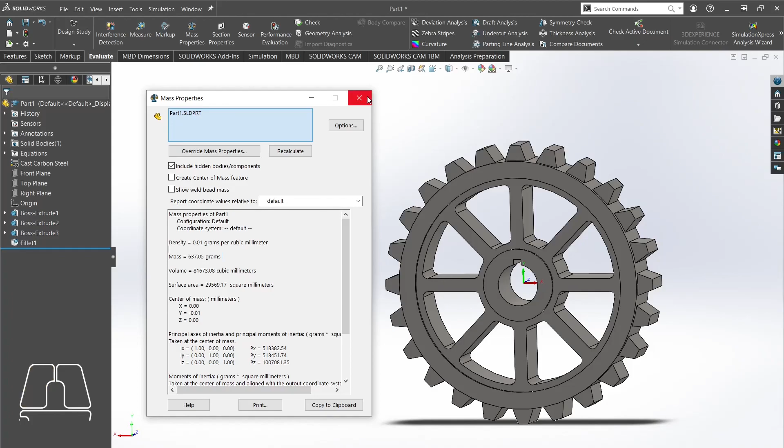Change the color a little bit to show you that it actually happened. And now if we come over to the Evaluate tab and click on Mass Properties, we should get a mass over here. And the answers should be in the description.

And then finally, if you ever needed to change the equations, you just go into here to Manage Equations, you pop this up. You have your global variables here, you can just change these numbers.